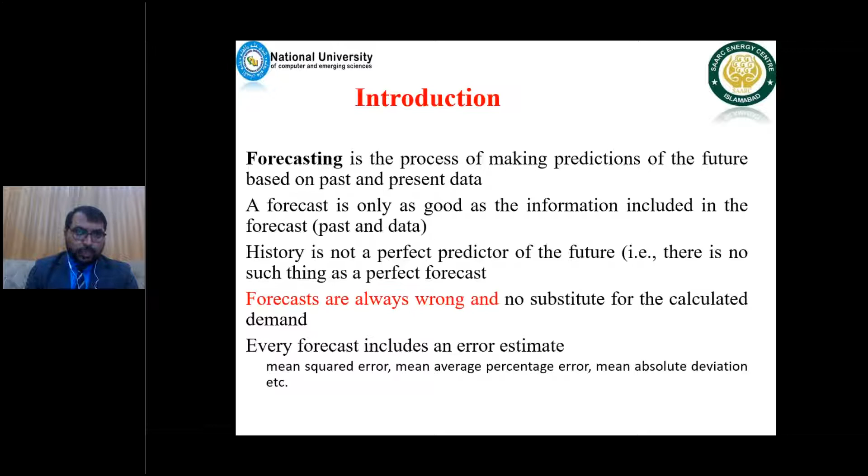History is not a perfect predictor of the future. There is no such thing as a perfect forecast. And let me say a very bold statement: forecasts are always wrong, and there is no substitute for the calculated demand. So there will always be a difference between the actual and forecasted value. To determine how much difference there is, we need estimation parameters like mean square error, MAPE or mean average percentage error, and mean absolute deviation.

So what should we consider while looking into past and present values? This is exactly what we call data science nowadays. We have to check among the collected data the trends it follows, whether linear or non-linear. We also have to find the seasonality, whether it changes from one time to another, whether there's a relationship like sinusoidal waves or cyclic elements, and the relationship of current data with previous data in the form of autocorrelation, and also any random variation. The more accurately you find that relationship, the more accurately you can do the forecasting.

Now let's come to load forecast. It is basically a technique used in power systems by power companies and utility companies to predict the power or energy needed to balance supply and demand. In other words, to have an optimum relationship between demand and response, because both underestimation and overestimation, under forecasting and over forecasting, may not serve the purpose.

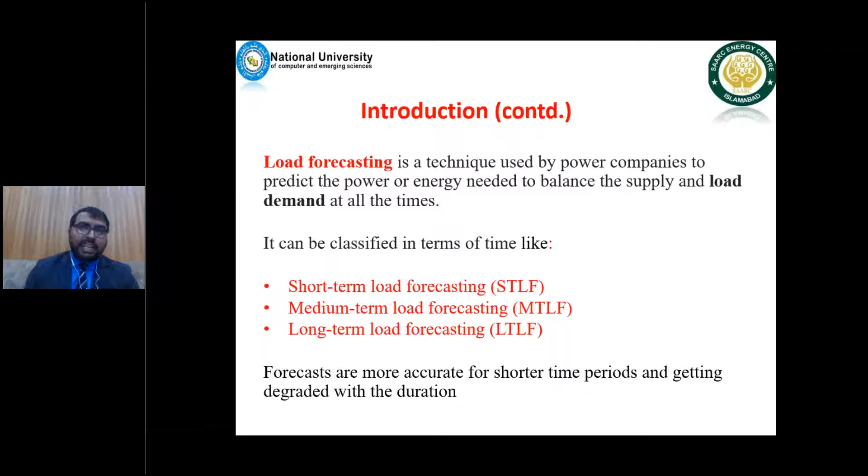It is normally divided into three broad classes: short-term load forecasting, medium-term load forecasting, and long-term load forecasting. It is generally said that the shorter the duration, the more accurate the forecast will be. So short-term load forecasting techniques give results that are comparatively much more accurate as compared to long-term forecasts.

The ability to forecast long-term demand of electricity is basically a fundamental prerequisite for the development of a secure and economic power system. It depends on many socio-economic factors such as economic growth of a country or region, industrial production in terms of CO2 emissions if tied to hydrocarbon emission, and economic growth tied to GDP or gross domestic product growth, as well as new technological developments incorporated into the system. Considering these independent variables, if we incorporate them into the forecast, how accurate it will be, we will see later on.

Why, in the first place, do we need load forecasting? To be very precise, we need to optimally utilize our generation resources, at the same time for capacity and network planning, to efficiently utilize financial resources, do financial planning, enable efficient power procurement, and sell excess power if we have it.

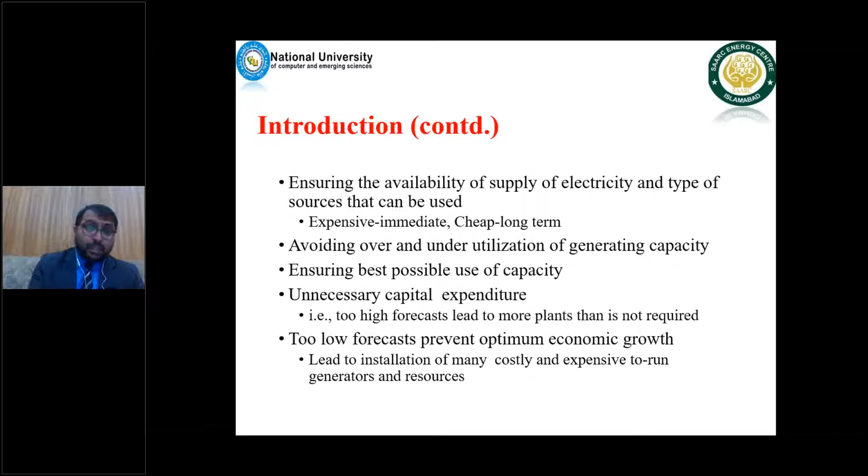So we can say that unnecessary capital expenditure, over forecasting, can sometimes lead to a situation where you have to use too costly installation, which is later on very expensive to run, as I mentioned about IPPs earlier. What is the most difficult thing in forecasting?

Obviously, it is uncertainties. There are different factors that can contribute, and on the basis of which the forecast may not be accurate.

These projects are sometimes large, and sometimes require a lot of time. There are uncertainties like unavoidable circumstances - once in centuries we have a pandemic like what we have right now, the COVID-19, and the forecasting done a few years back did not incorporate the pandemic and how economically it affected things. Who would have thought that India's economy will shrink 25%?

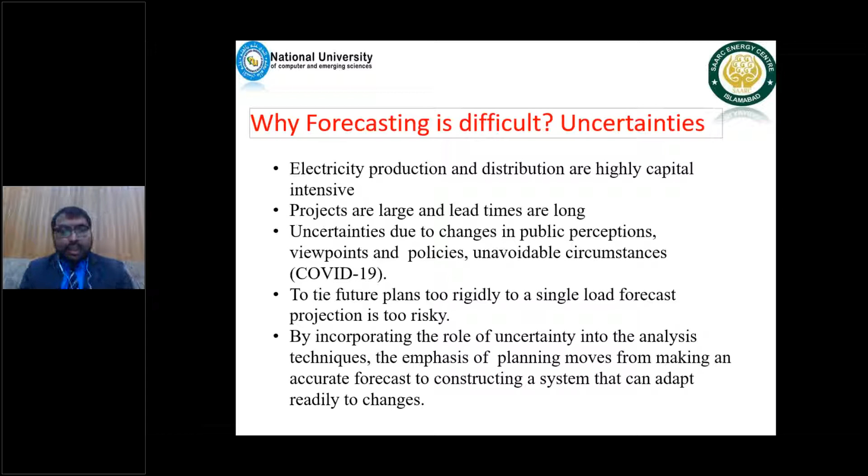That was not expected, but that's what happened. The majority of countries had their GDP, their economy, go negative. So these are the factors which are sometimes very difficult to incorporate in the forecasting, and as a result, the outcome or the accuracy may not be as high as expected.

Now let's come to the timeline of load forecasting. As I said earlier, they are divided into three different types of load forecasting: long-term load forecasting, medium-term load forecasting, and short-term load forecasting.

So in terms of hours to weeks, the forecasting which is for hours or up to a week is categorized as short-term load forecasting. While beyond one week, like from two weeks up to three years, this kind of forecasting is medium-term load forecasting.

And beyond that, there is a gray line between medium and long-term. Sometimes they are interconnected and considered as one. So from 1, 3 up to a few decades - some quote it as up to 20 years, but normally it's up to a few decades - it is categorized as long-term load forecasting.

So these three are used for different purposes. If we take short-term load forecasting, it is used for anomaly detection, for contingency analysis, and also for power quality disturbance forecasting. Though again, uncertainties are always involved there, but accuracy is comparatively much better than that of medium-term and long-term load forecasting.

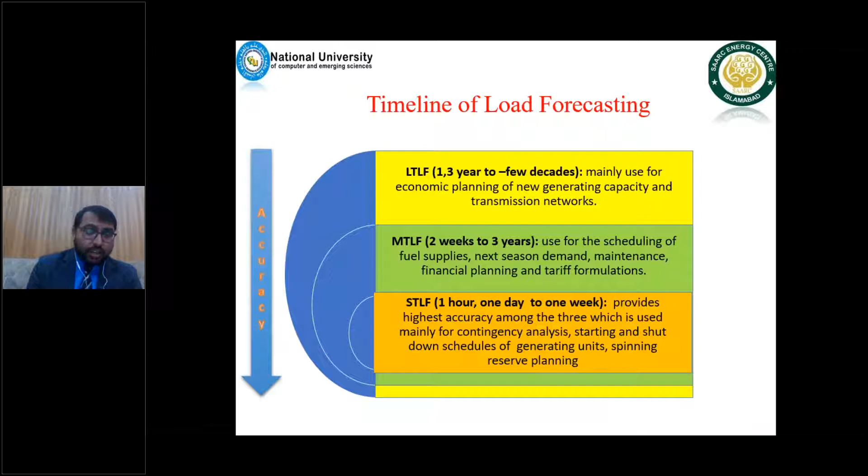So economic planning for new generation capacity must start now, and how the energy will be generated and utilized should be considered in the long-term load forecasting.

So this is the scenario of how short-term load forecasting is done. You have previous data, you have real-time data, and then you consider different exogenous variables, which are not directly in this causal system, like some variables contributed from outside. They are incorporated, and on the basis of that, short-term load forecasting is done for hourly data, data for a day, for a week, etc.

So what are the different techniques that are used, and which techniques are better in this scenario? There is another question that the audience may ask. Let's first discuss those techniques.

The most common techniques are called time series analysis. Most common techniques among them are autoregressive or AR, autoregressive moving average, etc. These are different types, so which is time series based.

Some of them are weighted autoregressive moving average techniques, and then trends are involved there, like if we incorporate trend in it, and other exponential smoothing and trend smoothing. If we incorporate that, we can predict and forecast in short-term load forecasting. Then multiple linear regression.

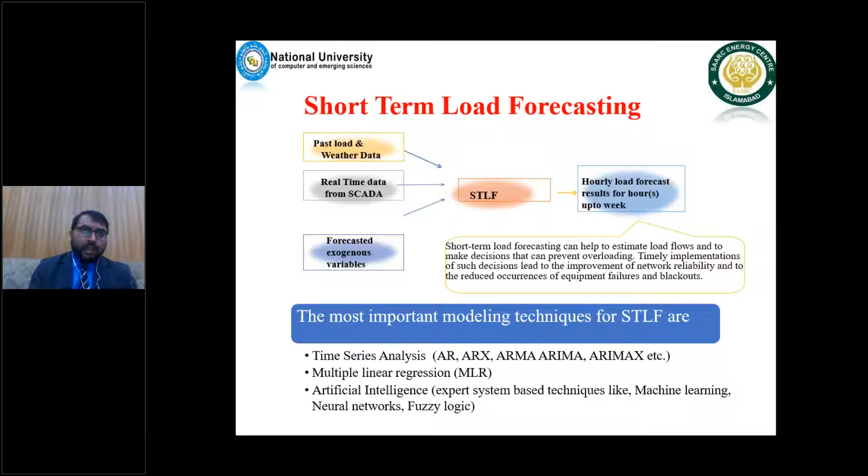On the basis of the most recent one is federated learning technique, which is for distributed energy generation. If we involve that distributed renewable energy system, we can get a more accurate result. So the future is there for AI systems, expert learning based systems. If we incorporate that and apply it on the system, on the basis of that we can do much better forecasting.

In long term, which is the main topic of this webinar, the scenario is almost the same, but the duration is different, and at the same time exogenous variables are different external variables which can contribute to the overall forecasting. The more variables, the more relevant factors that you include in your forecasting techniques, the much better forecast you can do.

So it is for a year to 3 years and up to few decades. For example, right now, if we are asked what will be the energy demand of Pakistan or India or Bangladesh or whatever SAARC region, the trend is almost the same. We are almost economically similar, in terms of maybe the GDP of Bangladesh and India is much better. So if we forecast, it will be better than a country like Afghanistan as well.

So you have to consider the GDP, you have to consider the telecom infrastructure, you have to consider the CO2 emission or industry that is involved, plus the EV policy, because the countries which are more friendly toward EV will have more electric vehicles. We will see on the roads the majority of cars being hybrid or pure electric vehicles in the decade to come. So for that, which forecasting technique will be better?

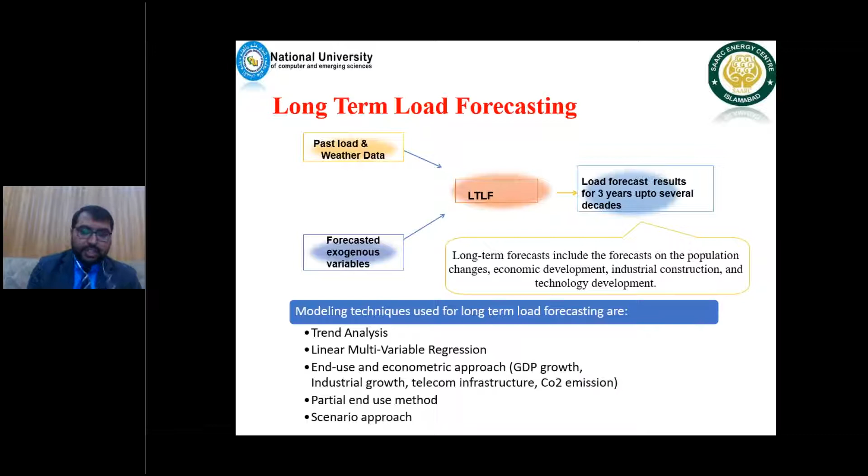Some of the models that we are discussing here are trend analysis, linear multivariable regression, end use and econometric approaches, which are based on independent variables or factors such as GDP growth, industrial growth, telecom infrastructure, CO2 emission, etc. Another technique is the partial end use method. What we mean by end use and partial end use method, we will differentiate between them in a while. And then scenario based approach, if we consider different scenarios for what will be the outcome.

So trend analysis, the first long-term load forecasting technique, is based on trend analysis. These methods are widely used as a tool for forecasting, which work with historical data in order to extrapolate past load growth patterns into the future. So trending techniques involve fitting trend curves to basic historical data adjusted to reflect the growth trend itself.

Let's say electric vehicles' percentage is growing linearly. It was like 1% 10 years back, 5 years back it was 2%, now 4%, and so on. So that is the trend that you have to identify.

The trend can be linear or non-linear. If there is some policy, suddenly the government policy changes, so in that case the trend will not be linear, and then you have to use some other mechanism in the form of non-linear trend, which we call quadratic. Similarly, exponential trend or growth, where if last year it was 2%, this year it can be 4%, and next year 16%, and so on.

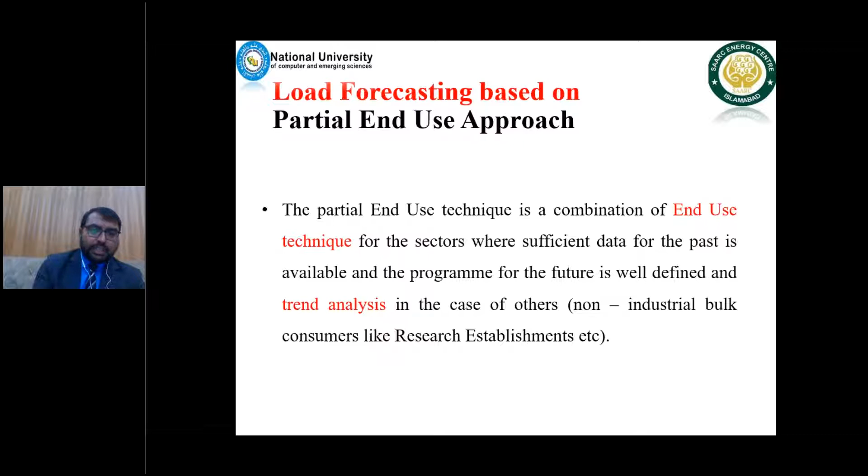Next is the scenario-based approach for long-term forecasting. If you consider different scenarios, suppose a country announces that they will have their own electric vehicles only.

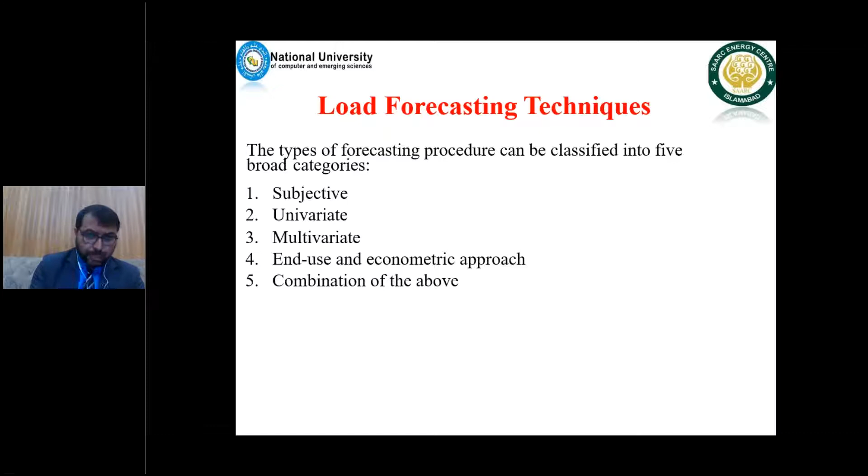Now let's summarize the general load forecasting techniques. There are five types of forecasting techniques: subjective, univariate, multivariate, end use, and econometric approach, in combination of all of them. By subjective, we mean individual opinion based on individual judgment, intuition, commercial knowledge, and past experience. The forecaster may or may not take past information into consideration, so sometimes the accuracy is not that high in this situation.

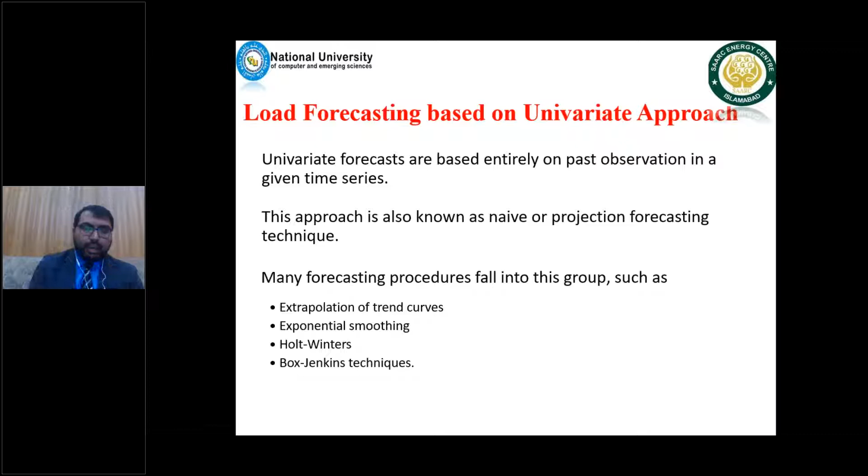Then the univariate approach, which is entirely based on past observation, uses techniques like Box-Jenkins techniques: AR, MA, ARIMA. These are all univariate approaches. Multivariate approaches, as I previously discussed with econometric approaches, have multiple independent variables and a single dependent variable. So combined, this approach is called multivariate, and these approaches are sometimes called causal or prediction models.

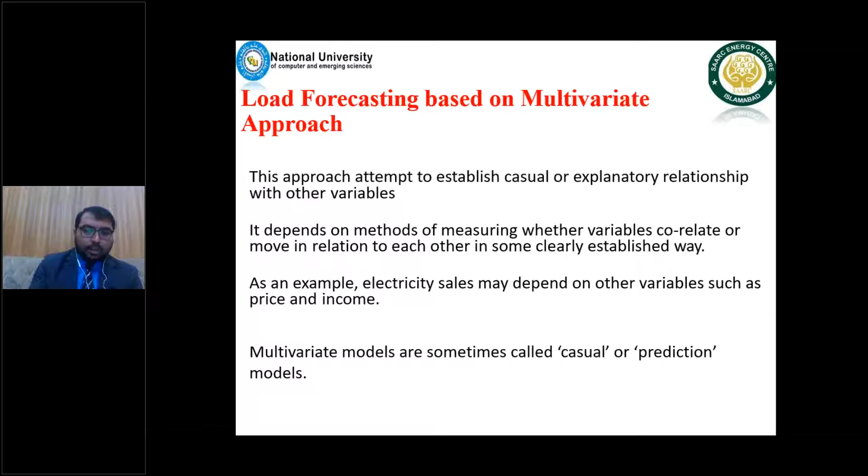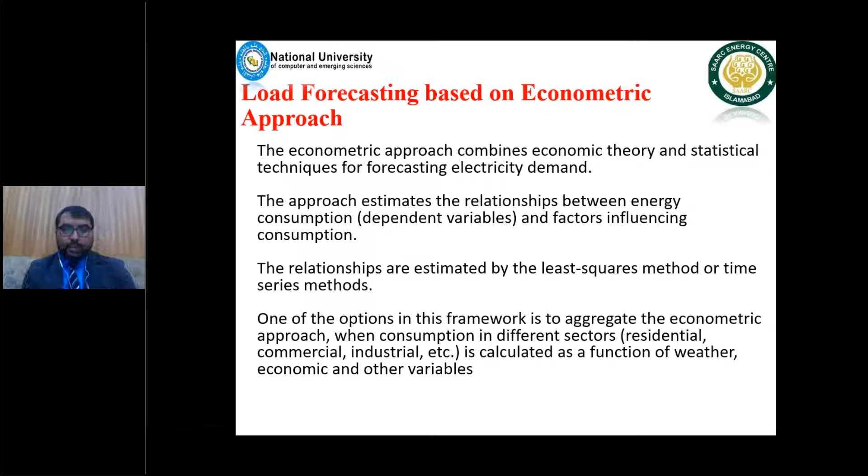Then econometric approaches: the variables I discussed, like economic growth, GDP, CO2 emission, telecom infrastructure - all those parameters are combined in order to find out the output in the form of dependent variables.

Finally, the end-use approach, which I discussed earlier - the description of appliances used by the customer, the size of houses, the community, the age of equipment, the technology being used. The final output is based on that data using some statistical technique or simulation model. This is called the end-use approach, while partial end combines the trend as well as the end-use approach, which is called hybrid.

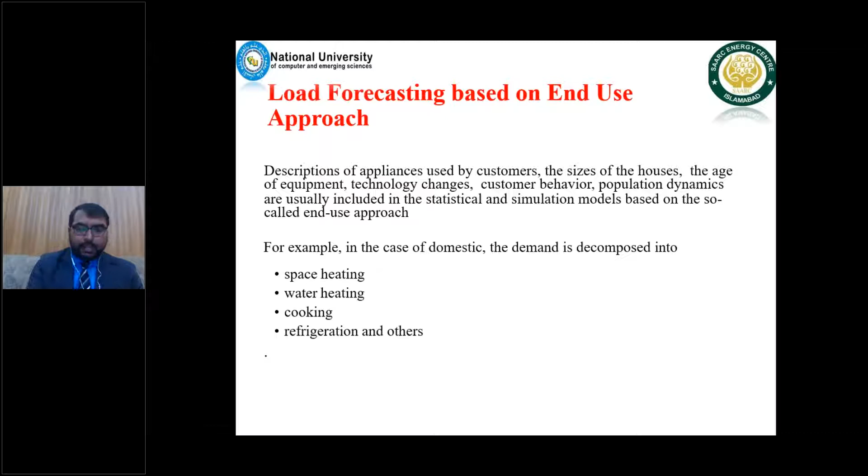So if we combine econometric technique, multivariate, univariate, as well as subjective approaches, combinedly we can use multiple combinations of techniques, and we call it hybrid techniques.

So if we summarize, the factors affecting long-term load forecasting are GDP growth, historical data, population growth - this region is one of the fastest in terms of population growth, and telecom infrastructure is also growing very rapidly. Even recently we had a successful installation through Huawei of 5G, and we can expect 6G also in this region. Even in Afghanistan, 4G is already there.

Particularly the trend of renewable energy resources and its utilization - if we take solar, the main hurdle was the prices, and now it is getting lower day by day. So we can expect in the future that per unit cost will be much lower, and its integration with the national grid will also affect overall long-term load forecasting.

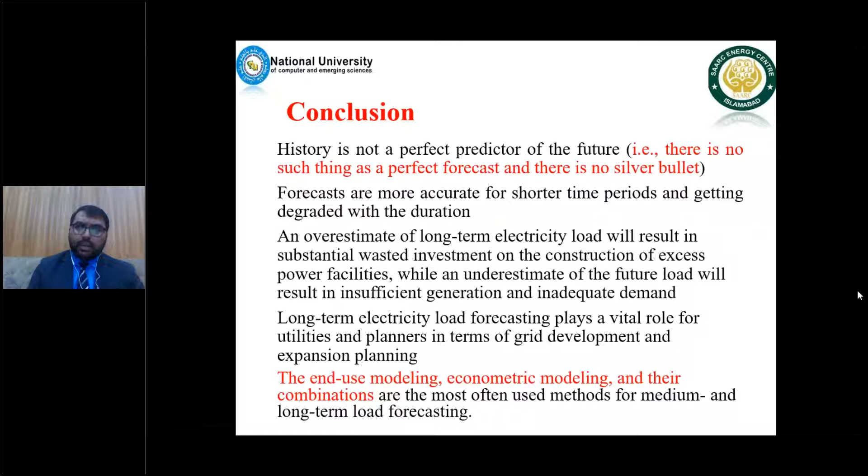So when we dug out, we found out that because they shut down the system, they turn on the system at 8 o'clock or around 8 o'clock and turn off few systems at 4 p.m. in the evening.

That's why you have these kind of disturbances as well. So if you can accurately estimate that, because brownouts and blackouts may not happen that frequently or that long, then you can predict how much these forecasting can contribute. That is what you can get, a better result, in terms of using short-term load forecasting techniques.

Thank you so much, sir. It was so nice of you. You gave a very detailed theoretical background in a very short time. Thank you for being with us. Thank you for having me, and sorry for the disturbance. I didn't know that my screen was hung. I'm sorry for that little disturbance. That's okay, and thank you so much for having me. Bye.

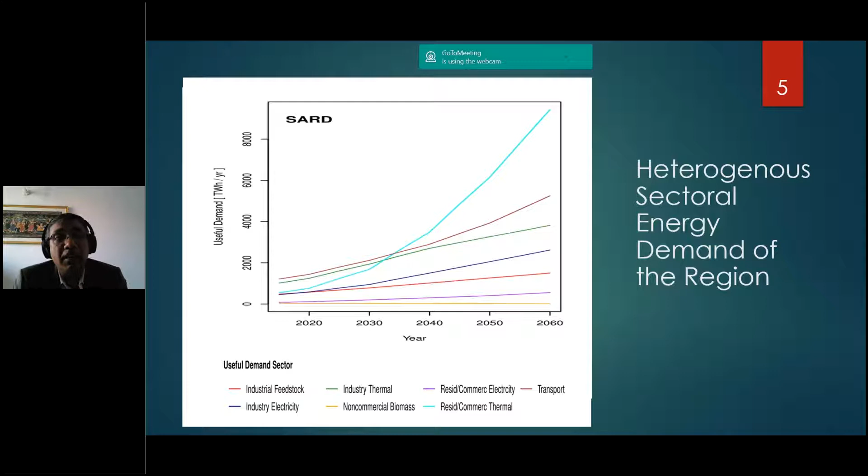Now if you see the industrial energy demand, it is the third highest, and vis-a-vis the transport sector growth is the second highest. This clearly indicates which sectors are the maximum energy consumers in the future in this region.

So the primary and final energy supply of the region - the top block shows the primary energy supply situation until 2050, which is mostly driven by coal, followed by gas. Gas is also significantly high, and there is also a lot of oil.

Solar and other renewables are not significantly coming as of now under the baseline situation in this region. This is mostly the fossil-based energy mix that we are expecting until the foreseeable future in this region.

Similarly, the bottom one is showing the final energy consumption by resources. You can see that electricity is coming up in a big way, but still until 2050, you can expect that around 20 to 30%, or less than 30%, of final energy will be supplied through electricity, but more than 30% will be from oil, and then subsequently coal, and even biomass.

So it indicates that the region is becoming, because electricity is supposed to be the relatively cleaner fuel use compared to direct coal use or direct oil use, so in that context, the region still needs to go into the cleaner side, because our electrical energy consumption in day-to-day life or even in economic activity is still lower. So we'll be using more oil, which will directly contribute to emissions, and also impact, because the whole region is basically a net energy importer.

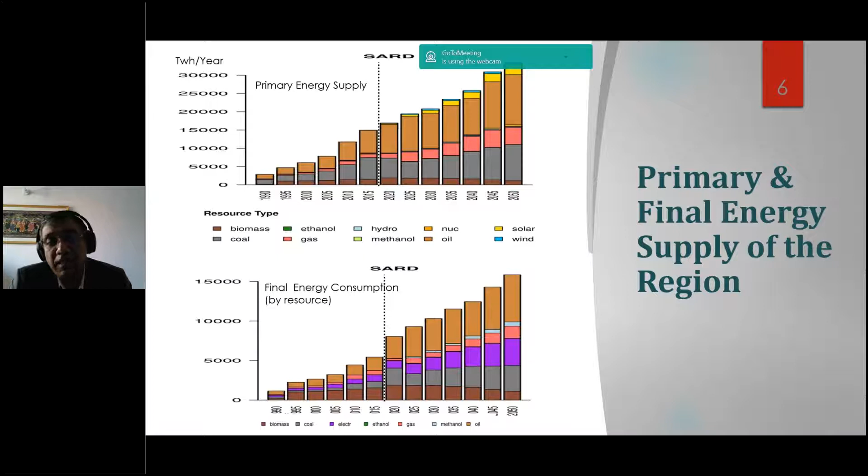This is the other side of the story, the final energy consumption by different sectors. The top one is the transport sector, the purple one. The red color shows residential thermal use, which includes cooling and all. The next part is the electrical part, the residential and commercial electrical section, followed by industry, and then other electricity use. You can easily see that residential, commercial, and transport are the major sectors, more than 50% of energy is being consumed in these two sectors only. This also indicates what should be our focus in terms of sustainable development and long-term energy planning, which sectors' energy consumption we should focus on.

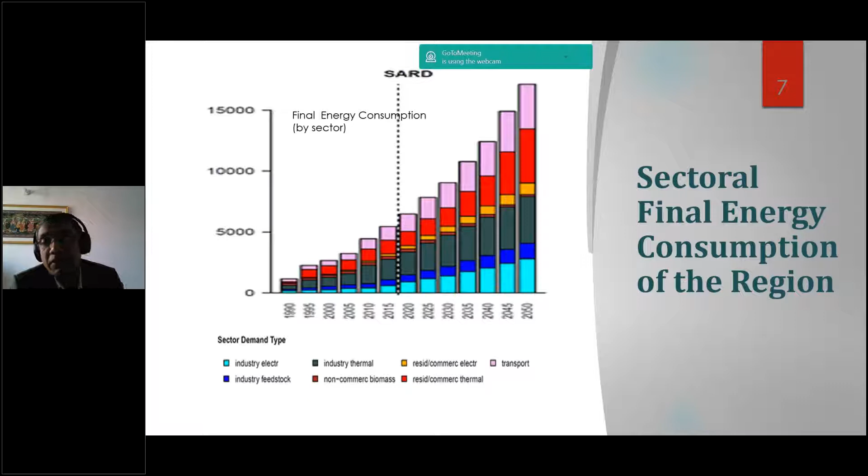Now, the need for the SAARC energy model. Basically, why do we need the regional energy model? There are six prime challenges we are facing in this region, and why it should motivate us toward regional energy planning, integrated energy planning. So there are six things.

One is the renewable energy target. This whole region has approximately 2,000 gigawatts of solar renewable energy potential. This number may not be accurate, but it could be nearer to that, which can be commercially used.

Now, economics of energy supply. The affordability of energy and power supply is very important for this region because of our economic status. We also need universal access to energy, 100% electrification, as well as reliable power and energy supply, which is most important for this region's continuous and sustainable development.

Then we need to reduce our energy loss, because that is a very big problem in this whole region, that our energy loss is so high. In some cases, it's almost touching 30 to 40%, which is basically like an open hole in the bottom of a tank, and whatever water we pour in will go out. So that is the case. Unless we plug in those loss reduction plans, whatever planning we do will all fail.

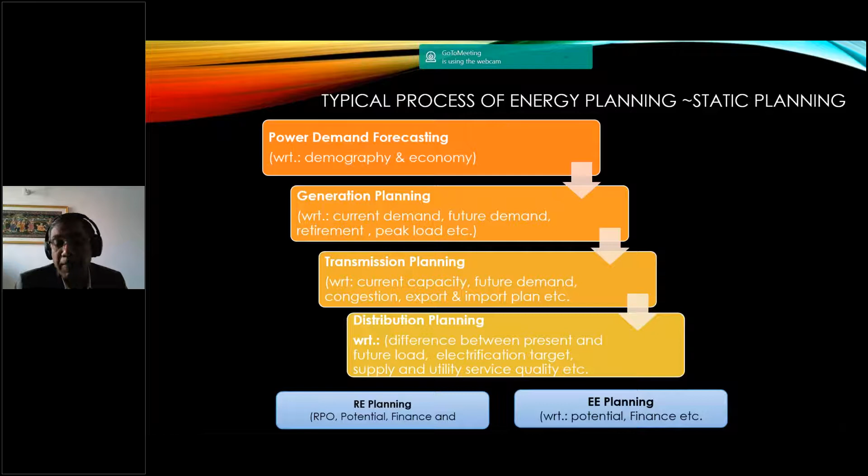Now the drawbacks and potential risks of the planning - these are the planning areas we have identified: demand forecasting, generation planning, transmission planning, distribution planning, RE planning, and energy efficiency planning.

But these are the potential risks. I'm not going line by line, but I've highlighted that in most cases, if demand forecasting is not properly done, it can lead to inappropriate assessment of demand and inaccurate assessment of different energy commodity demand. This leads us to the next level of risk in generation - if we don't do proper demand forecasting, it can lead to planning for overcapacity.

For example, we may need 100 gigawatt, but because of wrong assessment, we might end up setting up 200 gigawatt, and then 100 gigawatt is basically excess capacity. The problem will be that capacity utilization, the PLF, will go down, and you'll get into sunk cost. This will cascade through the system because energy flows, and once it starts flowing it cannot be stopped unless we have a huge storage system - and that would increase our cost. So the entire system has to be optimized to reduce total cost in the development process of the energy system.

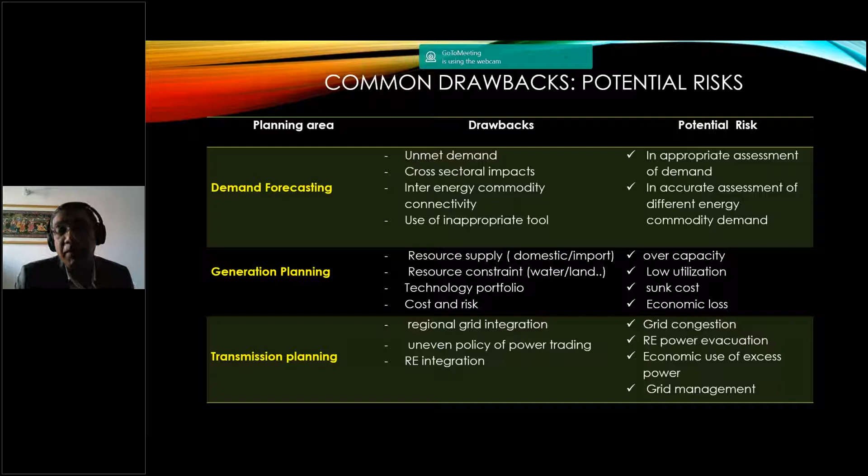That even further goes down to the distribution planning, and that is also affecting the renewable energy, because the RE planning, both grid connected and off grid, are planned. In most cases, what we see, at least in India, is that half of the capacity, like 100 gigawatt of solar, out of that 40 gigawatt we are expecting to come from rooftop, the off-grid net system, and 60 is planned for grid connected. But we are faltering on that target to achieve the 40 gigawatt.

Because there are plans and policies in place, but in reality it is not happening, because the distribution companies are getting afraid of allowing people to even set up small power plants, units on top of the roof. And net metering is also there, but they are not allowing them to wheel the power back. So that is disincentivizing the users to set up rooftops.

The fear is because the distribution companies don't know the capacity of their local network, whether they will be able to absorb this kind of intermittent energy or power coming into the system. So all these are a cascading impact of lack of planning, and that can lead us to the failure of all the major national level planning, policy, and targets that we are talking about.

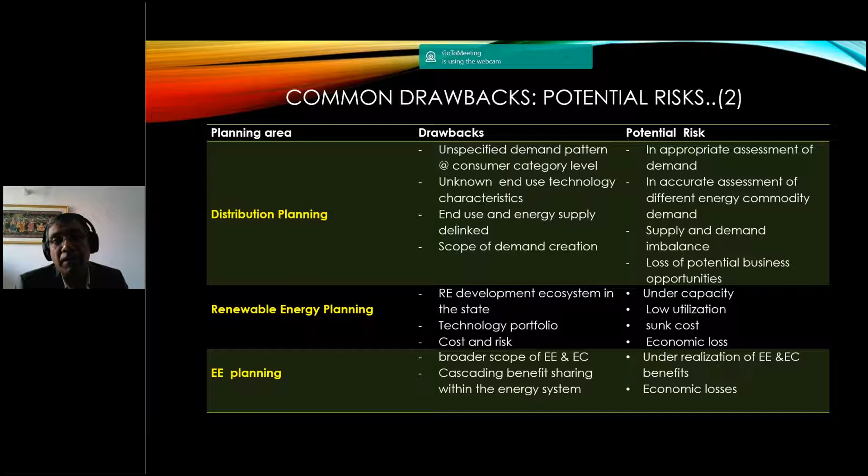All our countries in the region are moving towards the low carbon economy because that is the need of the hour. We cannot continue emitting GHGs for the sake of our own people. We need to do something. Side by side, we need to continue our development aspects because we need to grow, we need to feed our people, everyone needs to have a decent living standard. So to provide that, we need to grow. On the other hand, we cannot pollute the environment. So what is the solution? We need a proper balanced economic planning activity, and for that an integrated assessment is required.

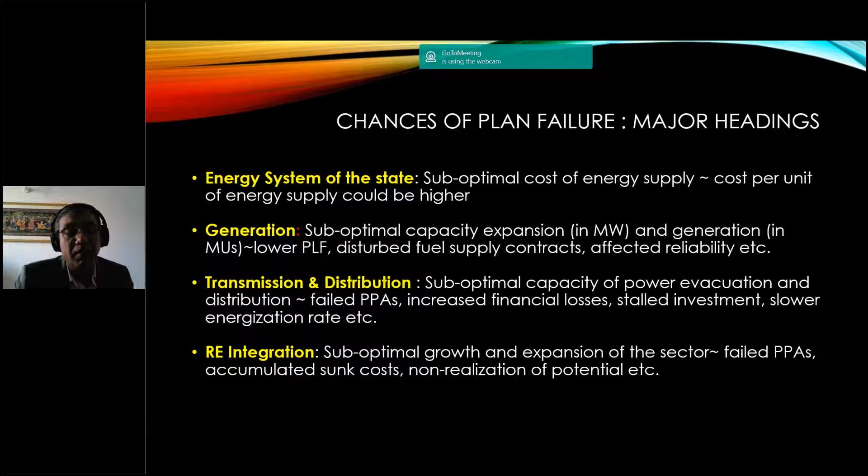I have already discussed these points, so I'm not going into too much detail. Now, giving all this background, what we are doing is developing the SAARC energy model. We are in the process of that, building it country by country.

So how are we doing it? Basically we are covering these aspects of sustainable energy planning: goal setting, what should be the regional goal, then what options the region has, then what should be the plan of achieving these options, then how it should be implemented, and it should be measurable and verifiable. Then there will be a feedback, an assessment done on a regular basis to see what changes we need to make in the final goal and subsequently. So this will be a circular process of continuous monitoring and evaluation of the system so that it can lead us to a sustainable future of energy.

So keeping that in mind, we are applying the MESSAGEix open source integrated energy modeling platform. This is an open source platform developed and promoted by the International Institute for Applied Systems Analysis. This is an intergovernmental research institute, and I think currently there are more than 26 member countries.

India and Pakistan are both member countries of IIASA. I don't know about the other SAARC countries as of now, but at least I know India and Pakistan were there. This is an open source modeling platform that has been developed, which is a very robust, very strong, and very advanced level of planning tool that can help integrate different aspects of energy planning. What I have been telling you is that it is not only electricity, but all other demands and technologies can link together in this system for planning. This is a least cost energy systems optimization, a pretty standard kind of least cost optimization linear programming type model.

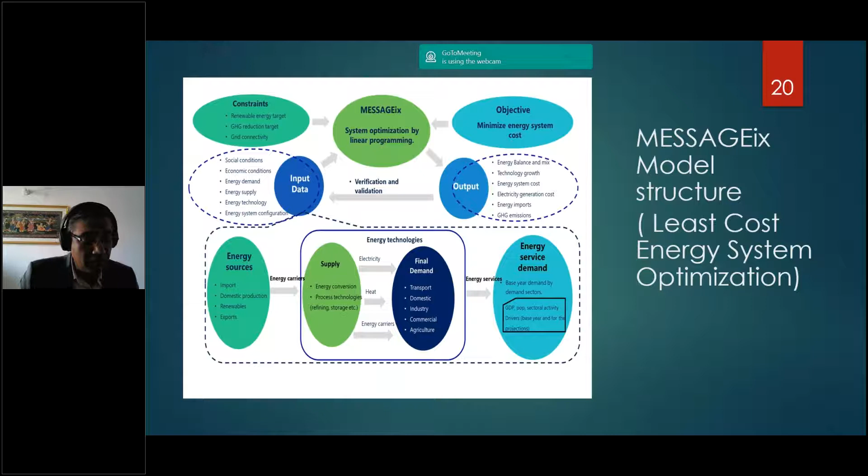We have recently launched the India model. MESSAGEix India was launched in 2018. We have also done a similar model for Bangladesh. We also started using these for different state levels in India, but this can be done for others and for different purposes.

Now we are developing Epitome, the Energy Planning Integrated Assessment Tool on MESSAGEix, which I thought would be an interesting topic to discuss today - how this kind of platform can be used at the regional level planning.

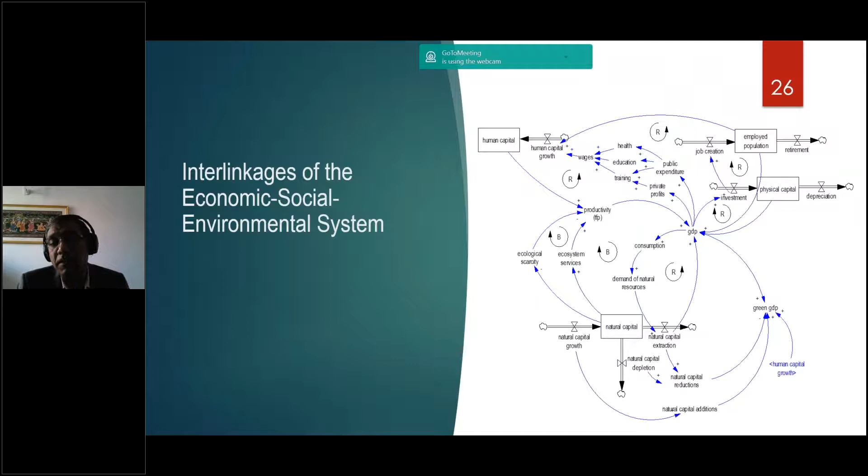Keeping that in mind, we have developed the planning model. We call the earlier one, which you've seen, the static planning model - the existing model right now for countries working on it. But we are proposing an advanced one, the energy planning and integrated dynamic planning, which covers and interlinks all the components of the planning.

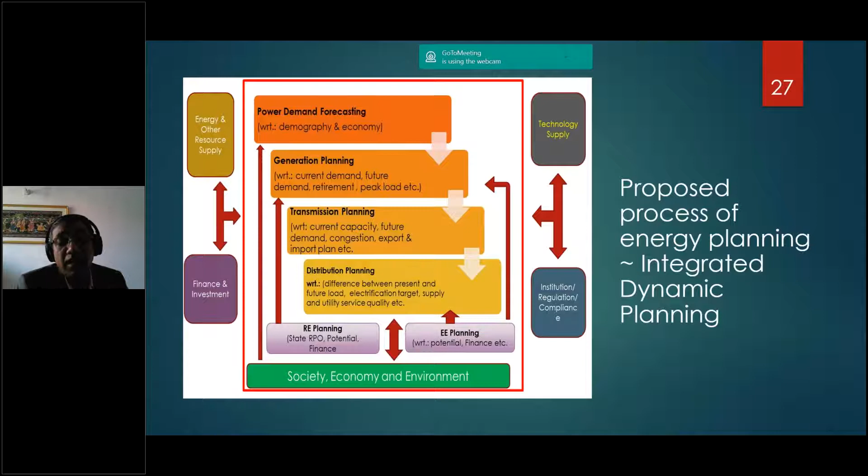Keeping this overall objective, we are conceptually framing a regional energy model, starting from the system dynamics approach, covering physical, natural, human, and social capital, then through a macroeconomic modeling process - we call it CGE-based macroeconomic, where CGE is the computable general equilibrium model, which determines the impact of macroeconomic conditions on different sectoral outputs, which we take in the context of energy.

Like all the sectoral energy demands - I mentioned at the beginning there are different sectors of energy demand, like industrial, transport, residential, commercial, agriculture. All these demands are linked to each other and to economic growth and development. So we really need to know what will be the future energy demand of each sector - if the economy grows faster, say 6% or 7% per annum, what is the expected energy demand growth in the agriculture sector or industry sector? We really need to know this, vis-a-vis.

So linked this way, we take that into the energy systems model, which is based on the MESSAGEix modeling platform. We are also trying to take the feedback to the power system model, which can provide very grassroots level planning. As my previous speaker was telling, power planning is very important for understanding where the actual infrastructure development is required.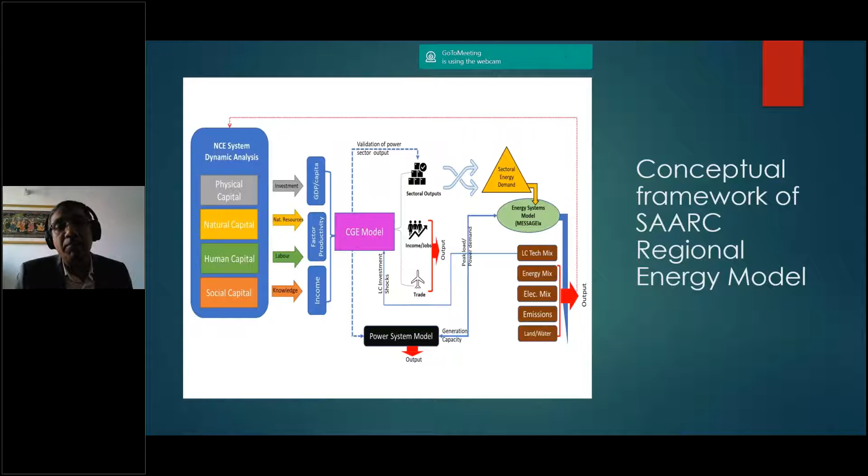So in that process, we are developing the EPITOME, which is a tool. Basically, we need this kind of tool because it is a complex modeling platform. It needs a lot of training and capacity building, and long-term association with this kind of modeling tool, and syntax writing and coding capacity. So it is not possible for everyone to use it.

So it was a kind of barrier in this country, at least from my experience. We have seen that this is a kind of barrier for this region to adopt this kind of scientific model-based long-term planning, which is very predominant in the Western world, like Europe, the US, or other developed countries. We often see that all government planning comes through some kind of sophisticated model-based assessment. But why is it not happening in India? There could be a reason that these kind of modeling capabilities and tools are not available so far. And the second option could be because of this complexity and the lack of understanding and skill set.

It was not properly understood by policymakers how it can be utilized. So we are trying to bridge that gap. We understand this is essential because of this situation, this region, the growth potential we have, and also we have a lot of complexities. The main complexities are the heterogeneity of the socioeconomic conditions and so on and so forth. So unless a sophisticated model is used, it will be very difficult to have scientific, long-term, sustainable planning.

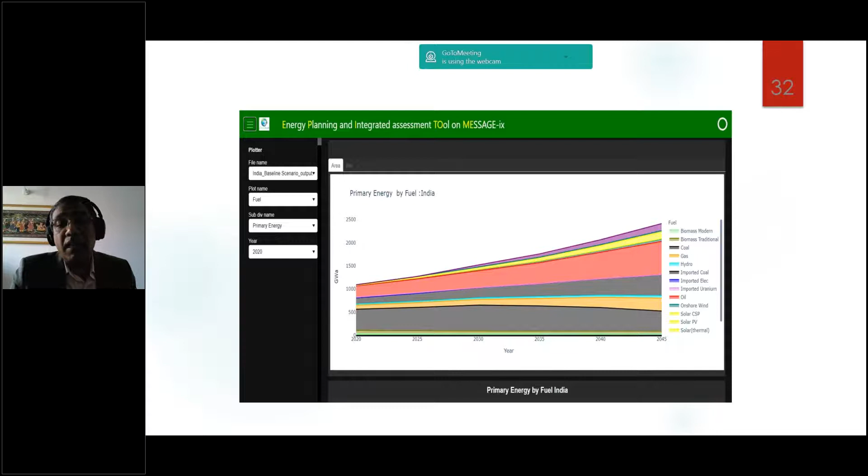There are two components of this whole thing. One is the static dynamic data analytic platform, which runs on preloaded scenarios. You can select the scenario from the left button, and go down to see the different types of energy mixes. I'll try to open the online thing and show you how it works.

Just a second. My screen is still visible, right? Yes, it is visible. Okay.

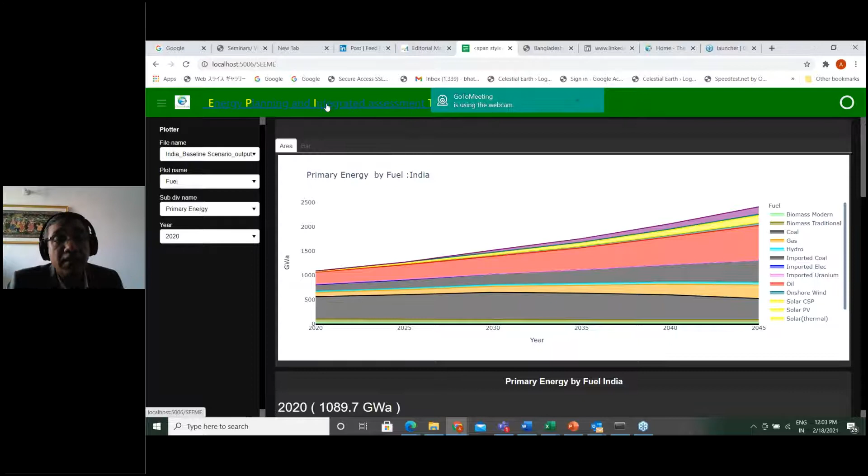So this is just the platform that we have created. The models are already preloaded. You can select, and you can see all the countries are here, like Bangladesh. We are working for other countries also. India, Indonesia, Pakistan are here.

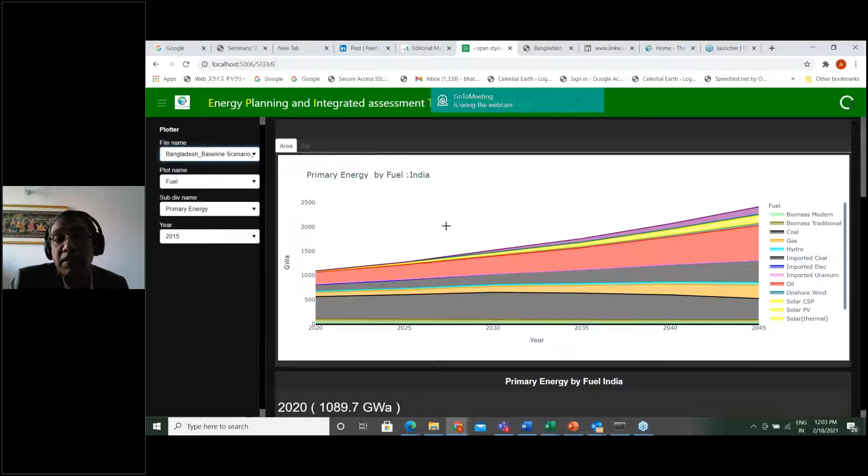If you just click, suppose for India, suppose for Bangladesh, it will load the Bangladesh information. This is all coming from the MESSAGEix optimization model. Once this is loaded, Bangladesh is loaded here, and then you can go down to see what is my sectoral breakdown.

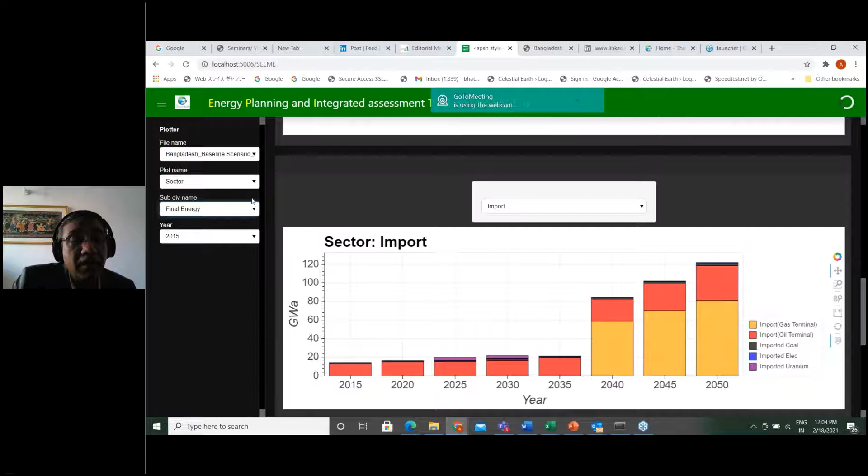The different types of sectoral, like primary energy and final energy. For the final energy, you see the sectors, like electricity, and the transport sector. You can see how my transport sector demand in Bangladesh looks until 2050, and who is consuming what. You can see the different types of transport and the different fuels that they are consuming.

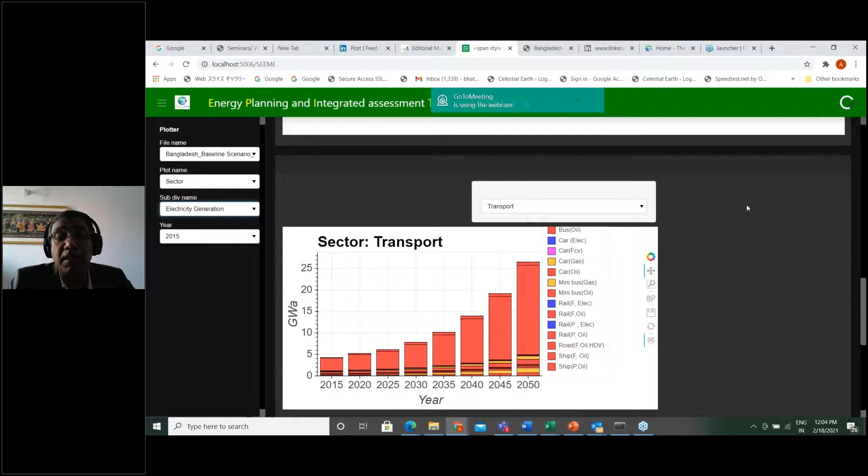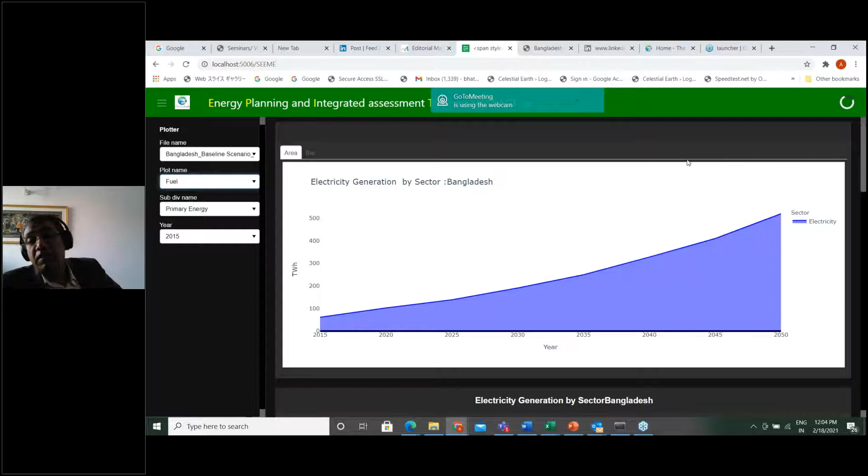You can also see the electricity generation of this country, and all this information is downloadable. This is by sector, and if you see by fuel, it will show you the fuel mix as well, showing what type of capacity, who is supplying how much energy.

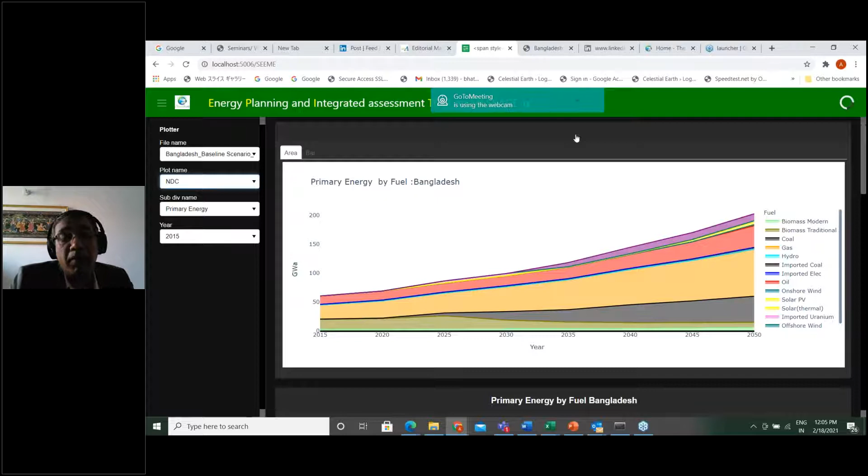This can also be used for different types of planning. There is an NDC planning tool which can help you understand, if my scenario is like this, what is my progress toward achieving my targeted NDC for Bangladesh, and this is our baseline achievement. If this baseline continues, the country can actually achieve this level of emissions.

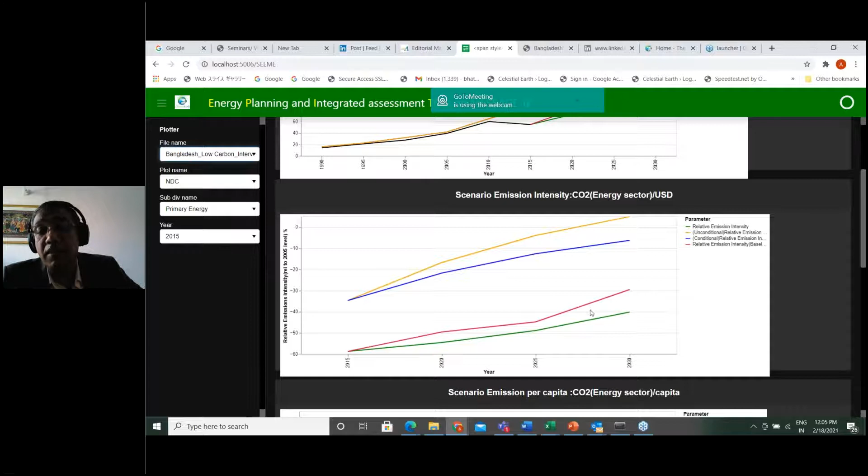Then you can see the emissions intensity to GDP, how my performance looks, with the red line as the baseline. If you go to scenario one, you can compare baseline and scenario, with the green line as the scenario. We have run a low carbon scenario for Bangladesh, and it shows that compared to the baseline, you are gaining a lot in terms of emissions intensity.

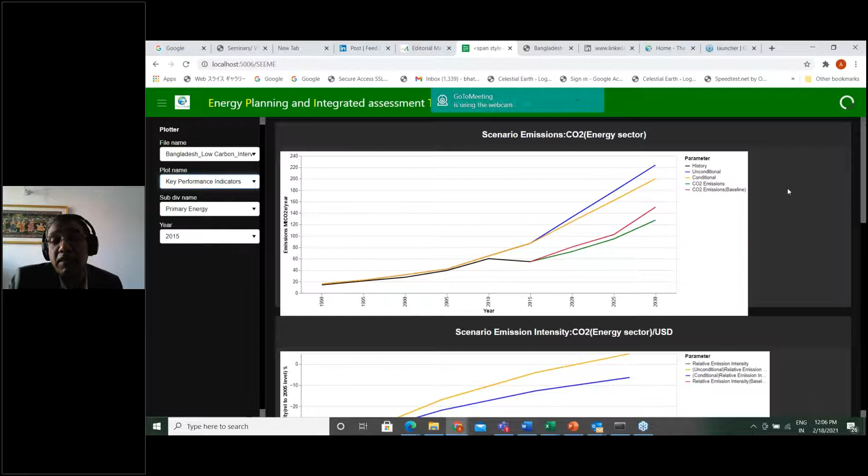This tool has certain important things like the key performance indicators of the country, which are very important policy tools for any country, like the system cost - what is the cost if I go for this particular technology - and what is my import dependency impact.

This is the import dependency, basically comparing the baseline and the scenario. You always see that the baseline is higher, the scenario is lower, so your scenario gives a better import dependency compared to the baseline. Similarly, you can see comparisons like GHG emissions compared to the baseline. This is all preloaded.

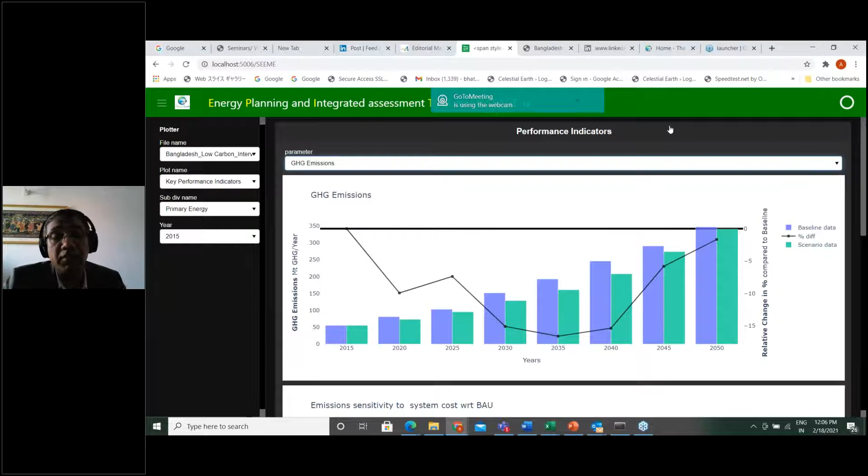This is one part of our exercise that we are doing right now. We also have another one, the decision support tool, also for Bangladesh, which is a web-based tool where you just log in. We are trying to integrate these two now under the same platform, which also helps with the slider-based scenario building exercise.

So the model is running on the server, so you really don't need to install anything on your computer. You can create your own scenario and run it through the optimization model. So for example, if you want to see the impact of a carbon price, you can set your carbon price here and run it.

Like in the transport sector, if I want to see that my electric mobility in the car segment baseline is 14%, but I want to change it, there is some check and balance here, but you can select this button, and whatever percentage you would like to select for electric vehicle penetration by 2050, you submit the button, and then you will see the result.

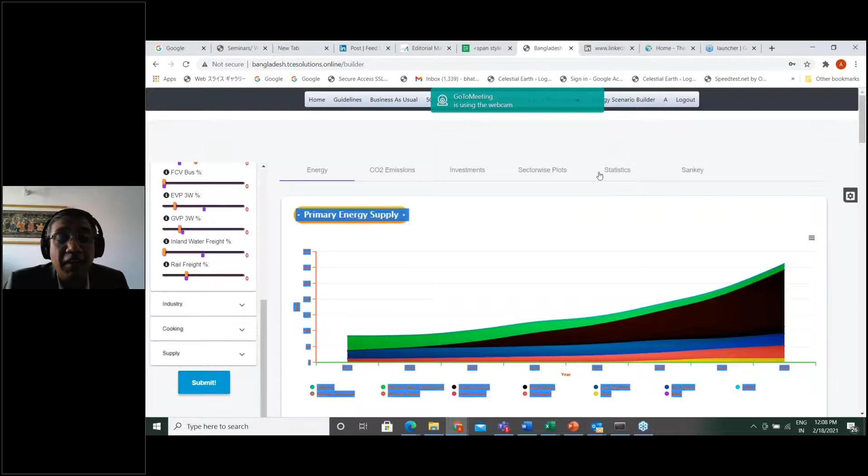But we also have a loaded scenario here. You can see this was a previously run scenario that I ran yesterday, the EV scenario, EV 30%. So I put the condition of 30% EV penetration by 2040, and then I ran the model, and you can see the results of what the impact is.

So like this, you can create any scenario you would want to see through this model, which will provide you the optimal results, and you can compare your results under different scenarios. This is the baseline, this is your high renewable energy scenario, this is the energy security scenario, and this is the scenario we just ran, the 30% EV penetration. So these are the models we are building upon.

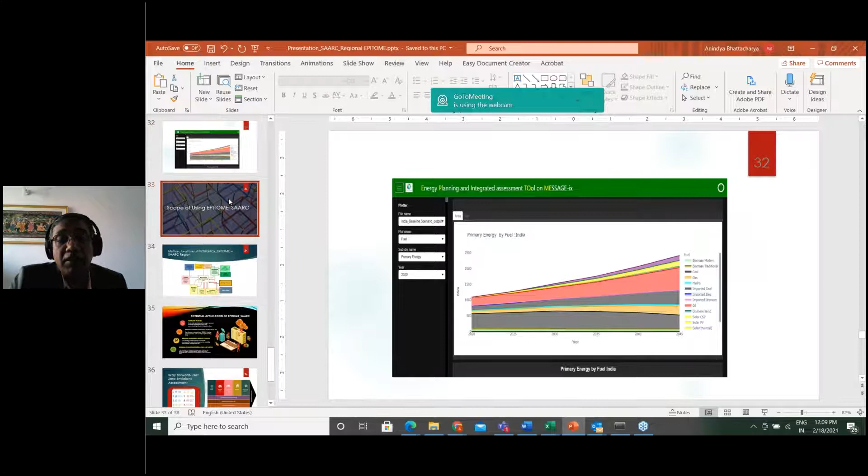Now I will tell you the scope of using such EPITOME SAARC for the region. This particular modeling platform is a versatile integrated assessment platform, so you can integrate a lot of things in this mainframe without much effort. This picture has been picked up from IIASA, but we are using MESSAGE as the energy systems core model.

Now we have added the cooling module. This module is integrated with MESSAGEix, and we are assessing the long-term cooling demand of the region.

Similarly, we are right now working on the basin model, where we are integrating the water, energy, land nexus in the model. We want to see the implication of water futures. Water is also interlinked with energy, so how future long-term water demand and water availability is going to impact energy and also land use. We are right now working on it.

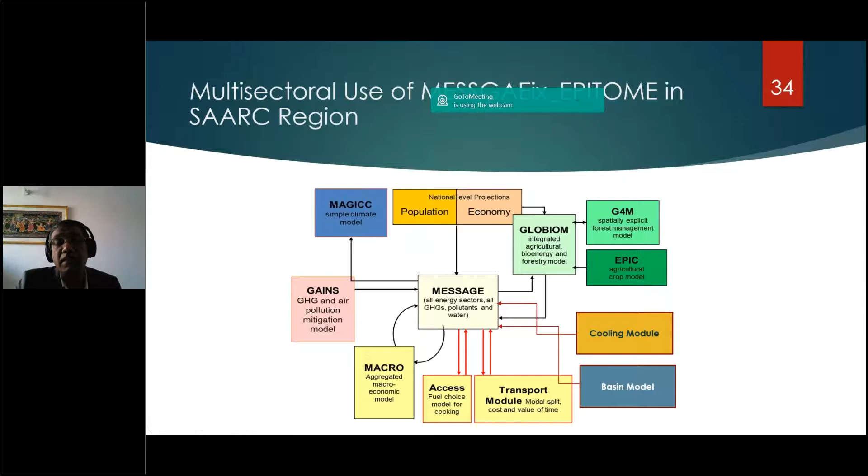The transport module has already been developed, you can see the detailed transport module has also been done. The GAINS model, or a similar type of air pollution model, can also be linked to it. MAGICC is a climate model, which can also feed into it. The linkages are already there, but you just need to activate it. And this part is the macroeconomic model, which I mentioned at the beginning, that we are also linking with the CGE type model. So this is the framework we are talking about now.

The potential application of EPITOME in the SAARC region, like it can be used for SAARC renewable energy plan, so it can help develop a target-oriented RE development plan and corresponding climate mitigation plan. It can also focus on regional energy efficiency action plan. It can also be used for regional sustainable mobility plan, and also regional climate mitigation plan and NDCs. So there could be other options and other potential applications of this kind of tool.

But I think I just picked up a couple of things which might be of interest. Similarly, it can also be used towards net zero emissions, which is a cross-sectoral effort that needs to be done, like deep decarbonization. A lot of new technologies can be assessed, like carbon capture and storage, not only CCS but CCU.

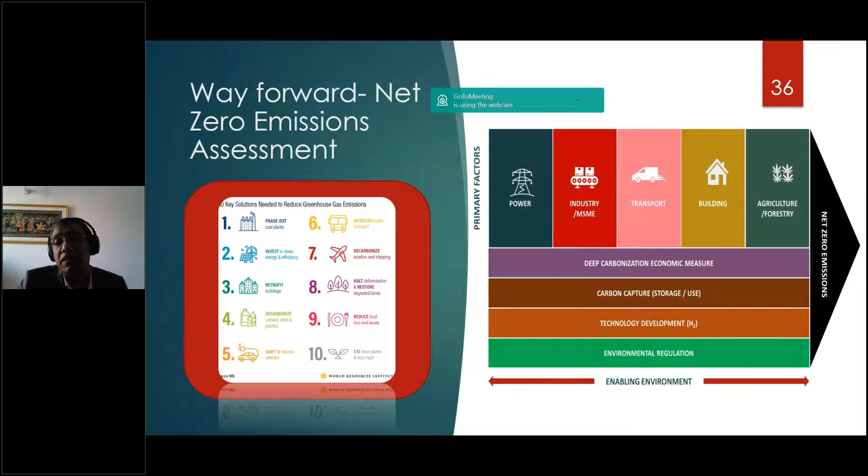Then the hydrogen technology can be assessed through this kind of modeling framework, which can finally lead us to net zero emission. This is the kind of development stages - a quite ambitious plan that we have over the next several years, but we are gradually moving step by step. So this is our current development status.

We have developed the national models in MESSAGEix for India, Bangladesh, Pakistan, Sri Lanka, and Bhutan, Nepal, Maldives are ongoing now. In terms of the Epitome DST platform, we have done it for India, Bangladesh, Pakistan, and Bhutan, Nepal, Maldives are ongoing. For the macroeconomic model, we just started - Bhutan is already done, but India, Bangladesh, and other countries are still in process.

Bangladesh will be first, and India will be completed very soon, and then maybe next year we'll pick up the rest of the countries.

For the developing modules, the cooling and heating part has already been added. Green transportation is already added. The hydrogen component has been added. And one ongoing activity we are now working on is the energy-water-land nexus module to be integrated with this model. Epitome SAARC is also an ongoing process.

So you can understand it is quite a long-term plan. We are developing step by step, and we are moving forward. Our final objective is developing the regional Epitome for integrated modeling. So I will stop here.

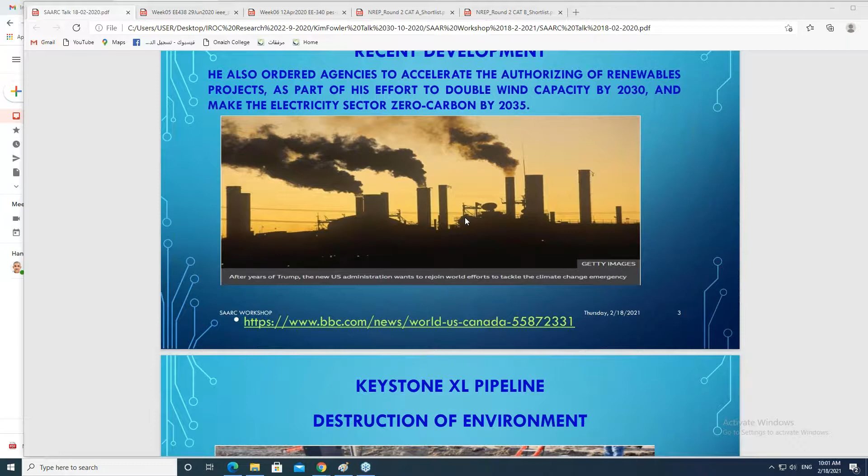That's why huge projects, one very big one I took from the BBC, was immediately cancelled by the Joe Biden administration. It was already in the works, a pipeline from Canada transporting oil down to the south of the US. This was cancelled, meaning some other priorities are now in the picture.

Such large projects also come with environmental damages, but they're also associated with job creation. So once you invest in big projects and later the project is cancelled, there are other side effects, meaning lost job opportunities and whatever investment had already been made.

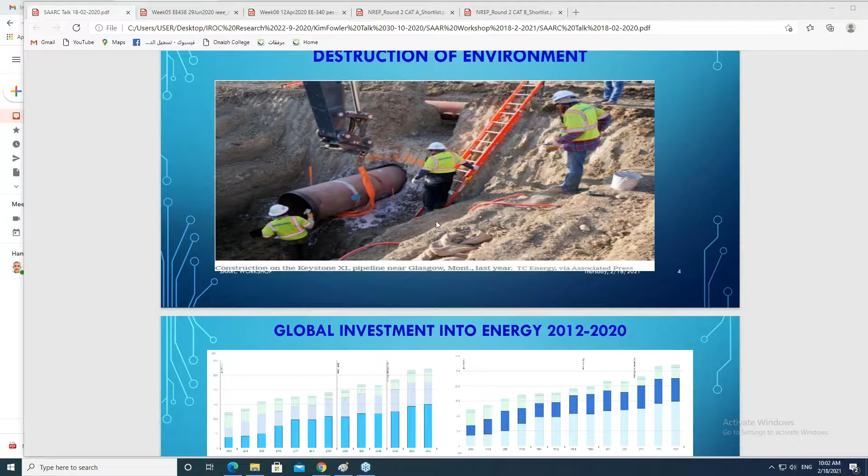Coming back to my own subject area, people are returning to DC, which was the original form of electricity generation by Thomas Edison. As earlier speakers mentioned, it integrated to a huge level because of AC, but the AC part was missing storage capacity.

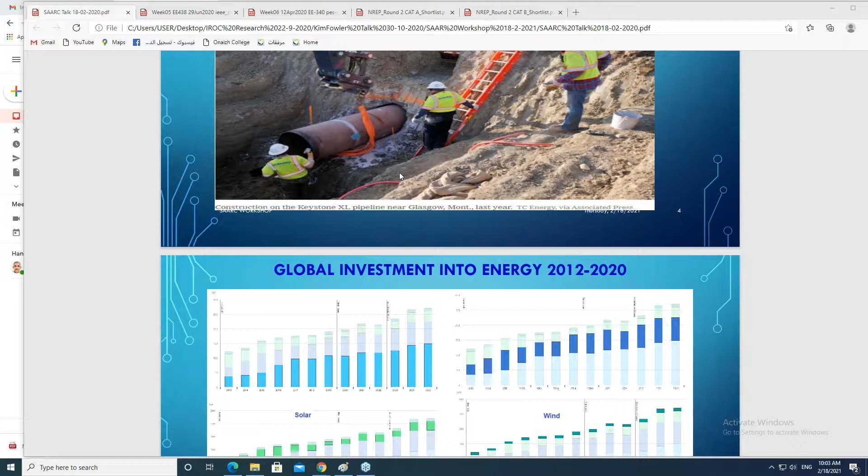So now attention is again turning to investment in the renewable energy sector, particularly solar and wind, because both can possibly be done very locally. Particularly in some countries, for example here in Saudi Arabia, and some like India, and of course in some African countries, it's available in abundance. So the question is how to harvest this and use it.

The potential in harvesting energy from these sources is that it can be harvested not necessarily at the time, but at the spot where it is needed. And because of storage potential, energy available at a time when it's not being used can be stored for later use when you need it.

This information I took from the International Energy Agency, IEA, website, showing how much investment has been made from 2012 to 2020 into solar, wind, hydro, and other renewable energy. Hydro is also in the renewable energy category because it's recyclable, but building large dams is more damaging to the environment compared to small dams.

In fact, solar, wind, and hydro were in use by human society since society's formal development. For example, we've used solar for drying our clothes, and for heating our water. I still remember, I'm originally from Peshawar, and when Hyderabad started, the original concept was that every house had to have a heater collected from the solar to heat the water of every house.

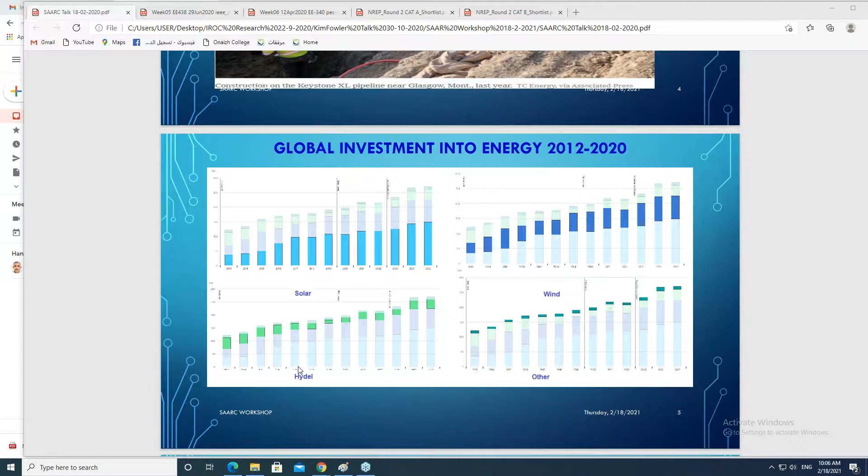I say this quoting from someone very important, Abdullah Yusuf Ali, basically from India, born in Bombay. He then settled working as a principal of college in Lahore. He says, when I was going to have a project, later on in my age I found out that sometimes people of our age are just planning and discussing and investing into that, but people in the young age, they decide today and tomorrow they go for it.

So I believe that China is doing that role, that's why they are leading this. The rest of the countries are behind for these 4 years.

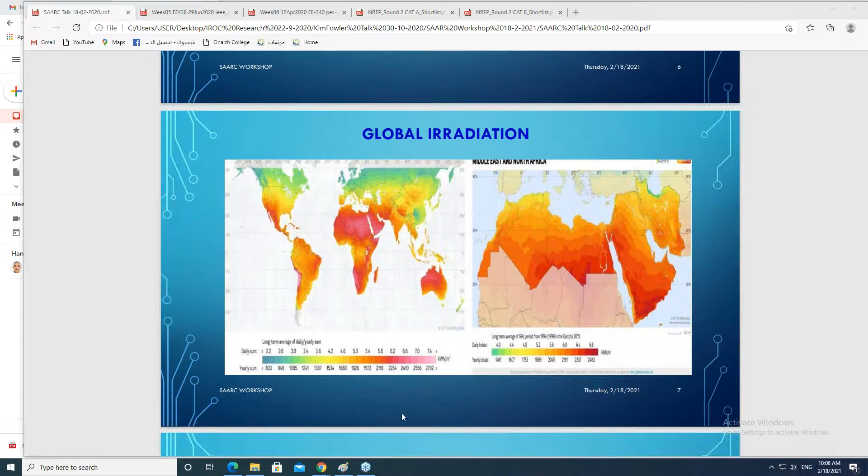And now coming to irradiation. This is a slide I've taken from one of the speakers, because the IEEE Saudi section is organizing a very important series of talks, and I'm also providing them with 1 or 2 speakers every semester - highly efficient webinars I believe. This I've taken from Prince Sultan University, some speaker from Abdulaziz, it should be mentioned here but it's not visible. So I've taken this from his slides, and this is also available on some source website as well.

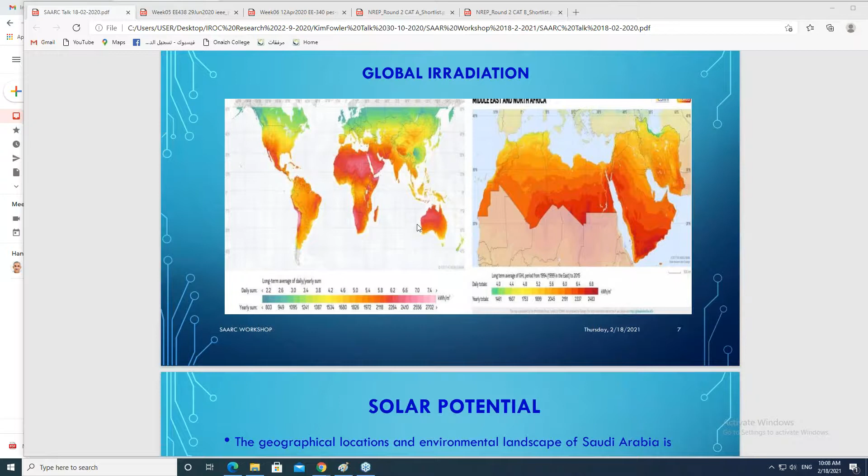Now coming back to the solar potential of Saudi Arabia. There is one student working with me from Qassim University at the postgraduate level, and I asked him to give me data of the electricity load, electricity demand, for SEC, Saudi Electricity Company. I also asked him to give me, latitude and longitude wise, the solar and wind potential of Saudi Arabia for some main cities, like 20 towns. So next data is coming about that.

So Saudi Arabia has got a potential of 2121 kilowatt hour per square meter per year average. When you divide this by 365, it comes out to be this per day, and that is mostly at a place called Abha.

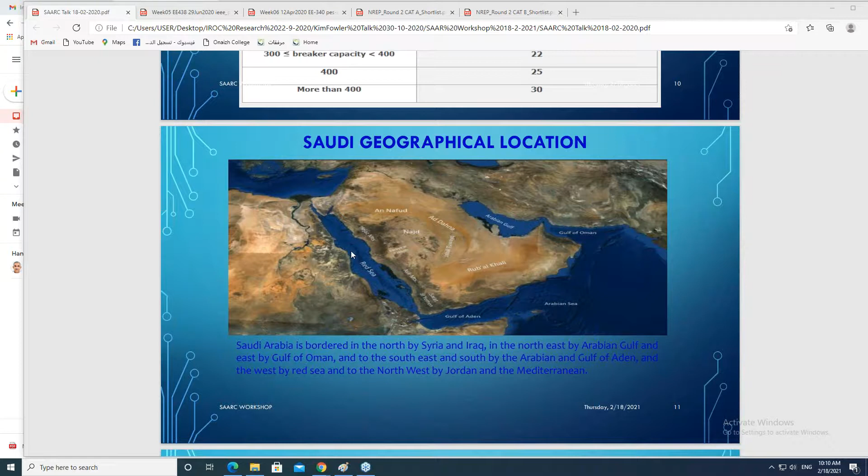Moreover, Saudi Arabia is surrounded - we call it the Persian Gulf, but also called the Arabian Gulf. And then this is the Gulf of Oman, and this is the Arabian Sea down in the south, and the Gulf of Aden, and this one is the Red Sea. Then up in the north we have Jordan and Syria, and Iraq, and here in the north west there is some portion of Jordan and Palestine. So beyond that, there is a sea again, so all around, Saudi Arabia is surrounded by sea.

So under the influence of a constant flow of winds uniformly throughout the year, and moreover, it's located in a part where there is sunshine any time, right? So that's why this data - something I skipped some slide here, but it's okay.

Meaning, they are focusing, the Saudi focus is now on solar and then concentrated solar energy. There is, under the Ministry of Energy, a department called National Renewable Energy Program. Some data I've taken from them. One of my students from International Islamic University is now working with this department, and he says that they plan to produce 9.5 gigawatt of renewable energy in just another 2 years time. But there is a planning of 60 gigawatt of energy by 2030, which is the Saudi Arabian Vision - they call it Vision 2030.

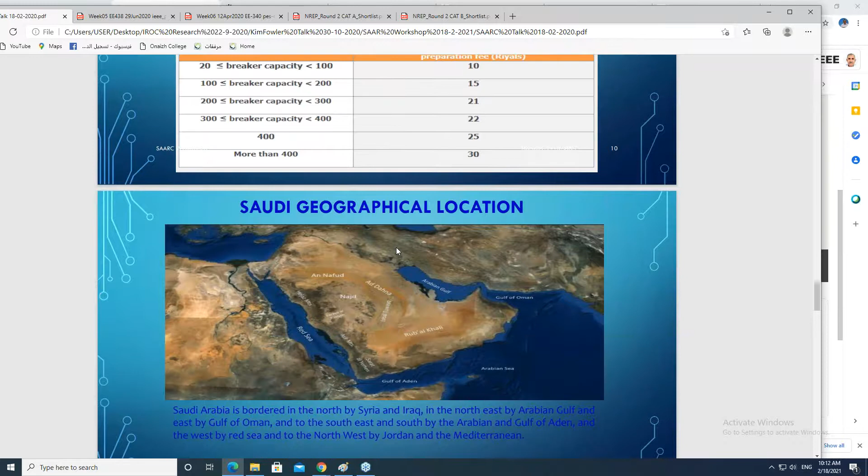So these two areas, the solar from solar panel, and then CSP using some mirrors and some mechanism, and then of course the wind. So SEC, the Saudi Electricity Company, is also giving encouragement to the consumer like this.

So you will see from this data, because of its geographical location, look, this is the electricity consumption of 2016, 17, 18, 19, 20 of Saudi Arabia. And this shows that there is a clear rise from May until October like this. I always put this as an assignment, and some of the students also collected this data - I'll show you that later.

So look, this pattern, if you draw lines like this, it shows like a camel shape structure, right? So this is for 1 year. This trend continues - if you collect data of the whole Saudi Arabia for 1 day, it will also be the same.

I'll show you some slides later from a magazine about India, which has the same pattern of demand variation. There's an increase in demand from May until October in a year, and an increase in demand from 10 or 11 a.m., depending on location, until 4 or 5 in the afternoon. At this time of day, you also have plenty of solar available, from 10 until 4 or 5.

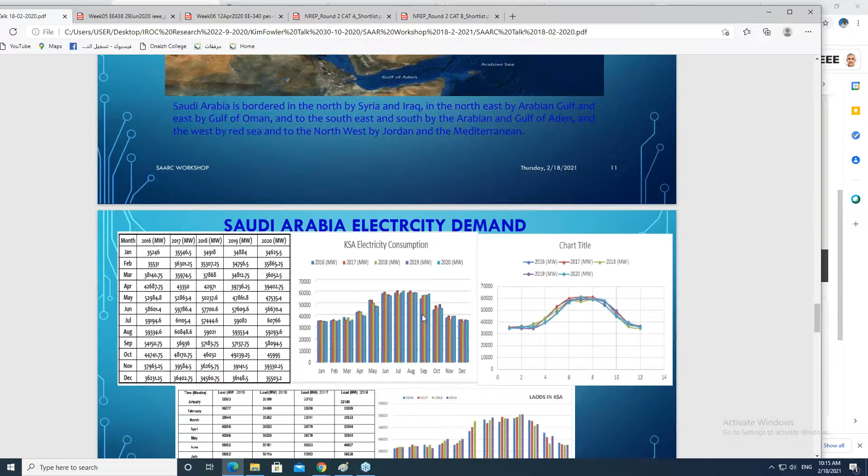For rooftop installations on houses, the energy is available from 10 or 11 until 4 or 5 in the afternoon, but you are not at home to use it. The same goes for the masjid, where energy is available, and other places like shopping malls collect energy but open later, like the American system, in the evening. So this energy can be stored, and the peak demand can be easily met from local generation of solar and wind.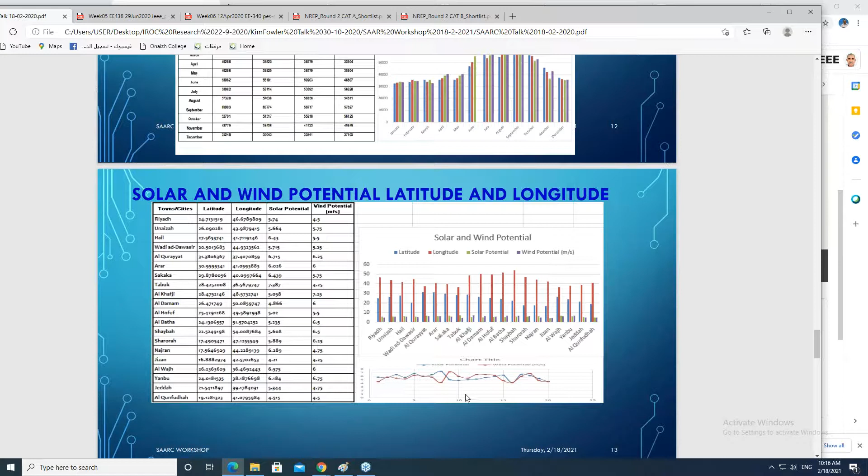This guy, his name is Sultan Al-Harbi, I'm thankful to him. He has collected the wind and solar potential of these 20 towns in a mixed format. I have plotted it here showing latitude, longitude, solar potential, and wind potential. It shows that the solar and wind potential throughout the year and throughout the country remains almost constant, with some up and down, but overall remains the same.

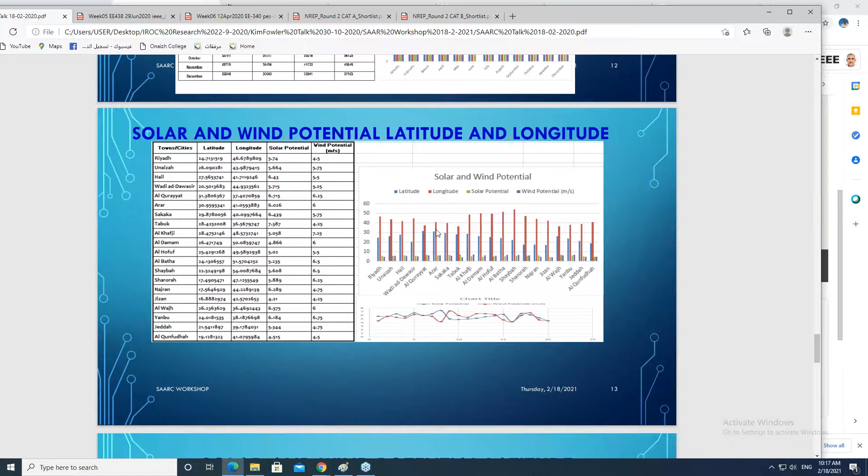Then I rearranged the same data by descending latitude and longitude, starting from the north and going down to the south towards the equator. This shows the latitude in descending order, but I have not rearranged the longitude, just the latitude. This solar and wind potential remains the same because of the geographical location, surrounded by areas where the wind blows at any time. So it may be very hot in summer, but when you go outside, it's affordable.

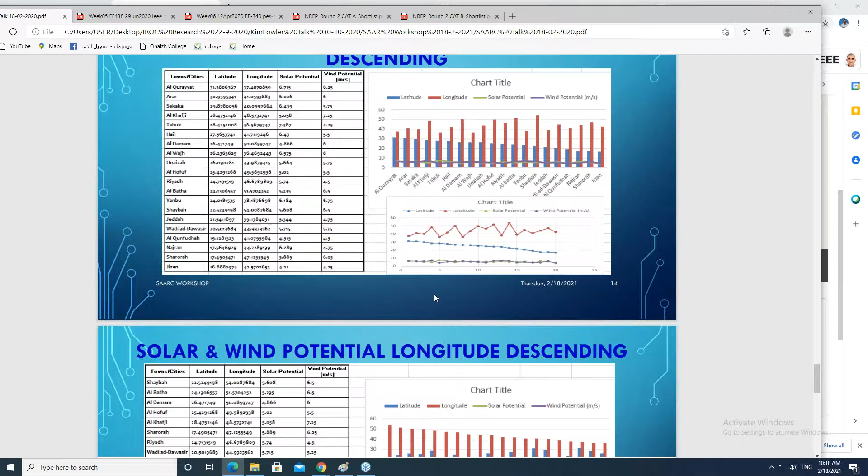This plot also shows that the solar is here, and the wind, in green color, is also the same for all these 20 towns or cities. So it's constant. That's why Saudi Arabia is in a very nice location for harvesting both solar and wind.

Here I have arranged it from east to west, approaching the Greenwich, in descending longitude. This is from Shaybah, then Al Batha. Once again, the solar and wind potential shows the same pattern, not much up and down, meaning conditions are more or less similar throughout the country.

The location of Saudi Arabia is such that if you look at the landscape, there is very little absorbing power for rain, even if it rains, the soil doesn't have the spongy capacity to keep the water in. But the solar and wind is available throughout.

I believe Saudi Arabia is in a location where it can become a hub of solar and wind, primarily for its own use. I'm not thinking too much into exporting this energy, though of course there could be benefits for others, but there is too much tendency toward making it a market, an export or junction point for exporting to other countries, associated with other things also.

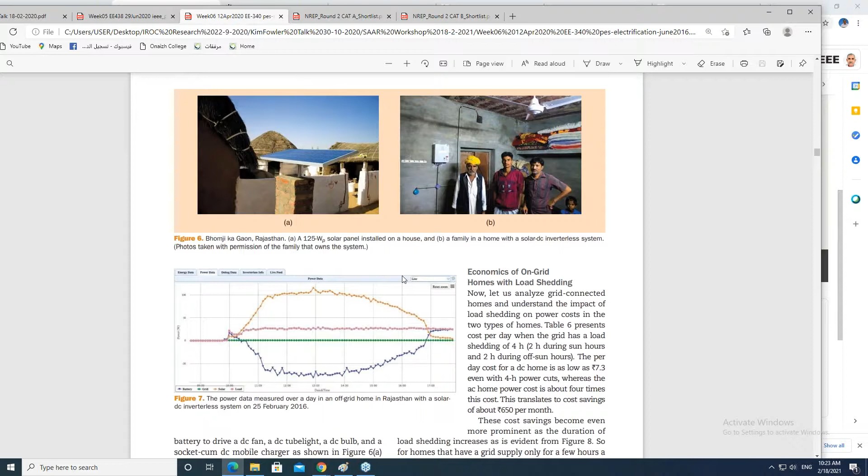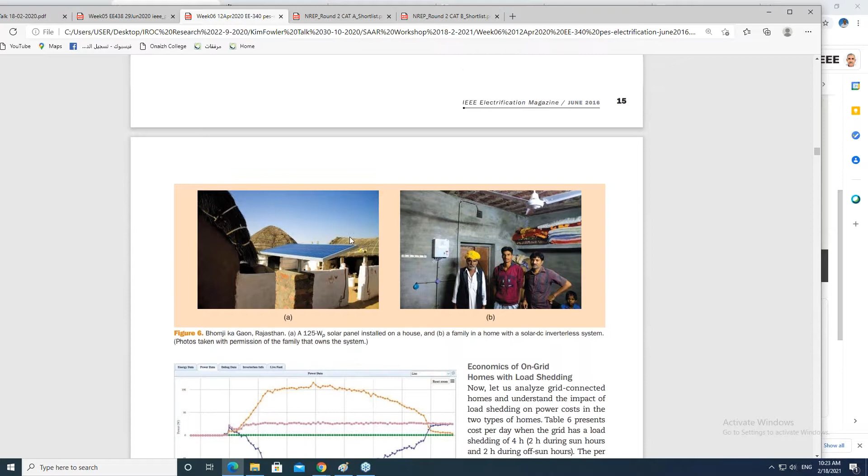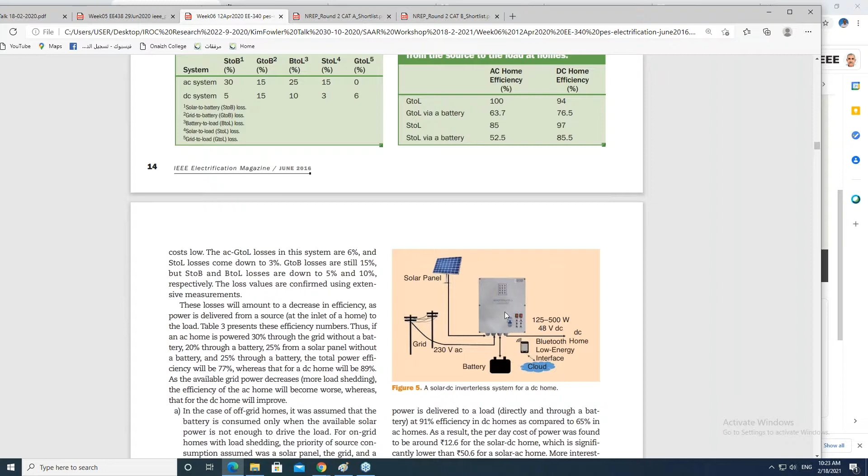Let me show you something from India - this appeared in one of the magazines, a whole project about India. Look, they are also working on such kind of generation, for a small village or small town, connected with the local house grid like this. So 230 volts AC is available outside, but the local supply is being made from the solar panel, like this.

So at the end, I think Yahya Mahaha Al Fakihi - he is an IIM graduate and now working with the national renewable energy programs of Saudi Arabia. And also Sultan Al Harbi, who is a postgraduate student at Qasim University - I'm not working with Qasim, I'm in the Qasim state at a college, but he came and met with me, and I asked him, how did you know about me? He said somebody told me I should see you. So the data collection is by this, and I thank the SAARC office of Islamabad.